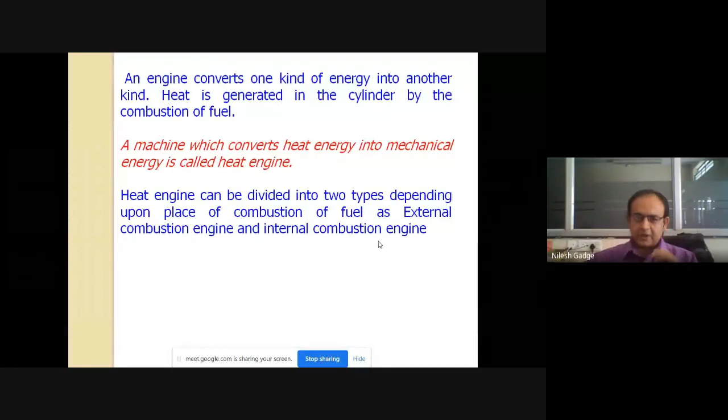In this type of engine, the combustion of the fuel takes place outside the cylinder. Such type of engine is called an external combustion engine. Steam engine is an example of external combustion engine. In a steam engine, coal is used as the fuel, and the burning of that coal takes place outside the cylinder. That's why it is called an external combustion engine.

Coal is burned in the furnace to boil the water in the boiler, which generates the steam, and then the steam thus generated is used to run the engine.

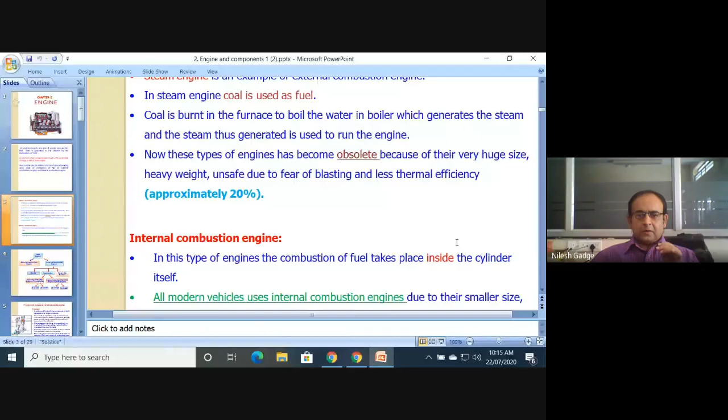Its thermal efficiency is just 20%, so it is not used nowadays.

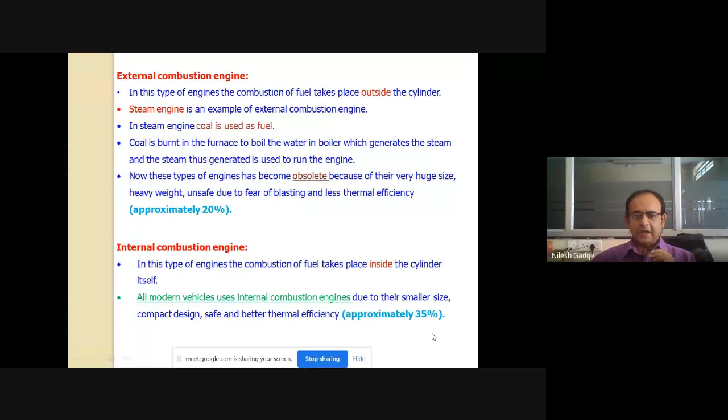Internal combustion engine, in short, is called an IC engine. In this type of engine, the combustion of fuel takes place inside the cylinder itself. All modern vehicles use internal combustion engines due to smaller size, compact design, safety, and better thermal efficiency. Approximately, thermal efficiency is 35%. That's why IC engines are used.

There is a classification of the heat engine: external combustion engine and internal combustion engine. Internal combustion engine is again classified as Wankel, reciprocating type, rotary, and gas turbine. We are going to study only the reciprocating engine. Don't get confused; the Wankel type, rotary, or gas turbine are not necessary. Just concentrate on the reciprocating type internal combustion engine.

It is again classified as spark ignition engine, and the second type is the compression ignition engine. Spark ignition engine is a petrol engine; in short, it is called an SI engine. Compression ignition engine, in short, is called a CI engine, and it is a diesel engine. The spark ignition or petrol engine is of two types: two-stroke engine and four-stroke engine, and the compression ignition engine is also of two types: two-stroke engine and four-stroke engine.

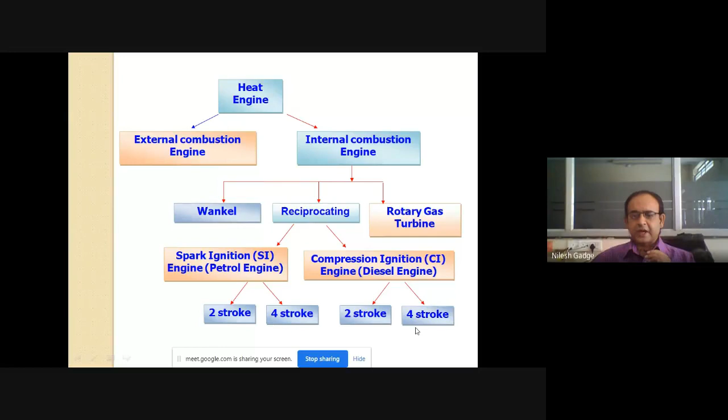So how does this engine work? It may be a four-stroke engine or two-stroke engine. It may be a petrol engine or diesel engine. Principle and working of internal combustion engine or IC engine. Principle: a mixture of fuel with the correct amount of air is exploded in an engine cylinder.

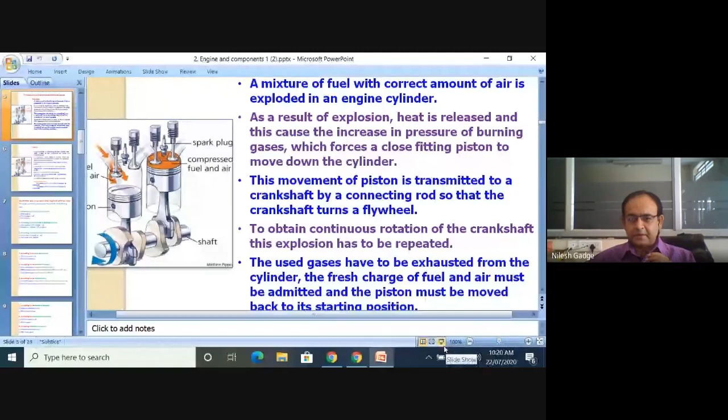So as a result of the explosion, when air and fuel mixture gets exploded inside the cylinder, we can see that power is generated. The power is generated inside the cylinder. Just now see the principle of working, or general principle of working, of IC engine.

As a result of explosion or combustion of air and fuel mixture inside the cylinder, heat is released and this causes the increase in the pressure of burning gases. So, when the combustion of air and fuel mixture takes place inside the cylinder, a large amount of heat is produced inside the cylinder, and it causes a high pressure of burning gases, which forces the closely fitting piston to move downward.

The piston has gone upward. It will come downward because of the pressure developed by burning gases. This movement of piston is transmitted to crankshaft by connecting rod so that the crankshaft turns a flywheel. Actually flywheel is the component; it is not shown here. The movement of piston is transmitted to the crankshaft. See, this shaft is the crankshaft.

When the piston moves upward and downward inside the cylinder, it gives the motion to the flywheel, and it starts rotating. To obtain continuous rotation of the crankshaft, this explosion has to be repeated. Means combustion of the fuel should be repeated inside the cylinder so that this crankshaft will be rotated continuously, and this flywheel also will rotate continuously.

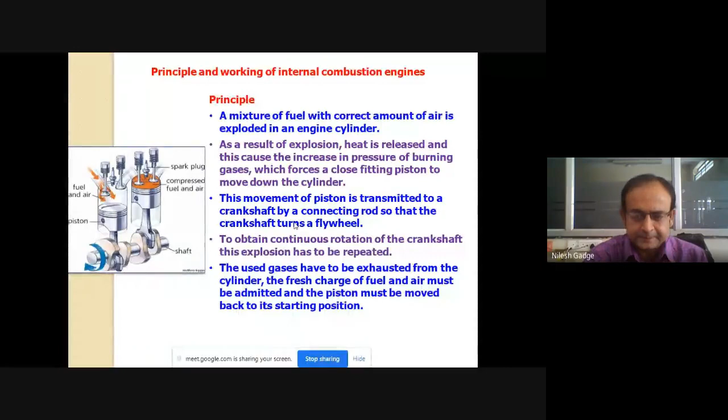Okay, so this is in general the working of heat engine or internal combustion engine. When we see the working of four-stroke engine and two-stroke engine, I will again explain this principle of working. Okay, so engine converts reciprocating motion of the piston into rotary motion of the crankshaft by means of connecting rod.

If you see the figure, the piston moves upward and downward. The movement of the piston is upward and downward. Hello.

So the piston moves upward and downward. When the piston moves upward and downward, this motion is called reciprocating motion. This reciprocating motion of the piston gets converted into the rotary motion of the crankshaft. That motion, with the help of this connecting rod, gets converted into the rotary motion.

This crankshaft is rotating. The engine converts a reciprocating motion of the piston into rotary motion of the crankshaft by means of the connecting rod. Piston is closely fitted in cylinder. Rings are inserted in the circumferential grooves of the piston to prevent leakage of the gases.

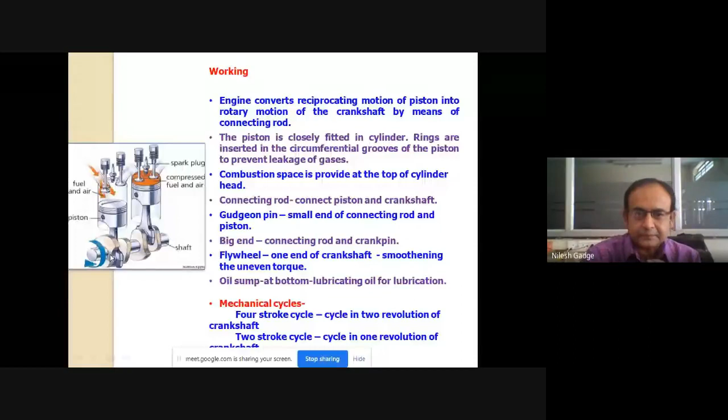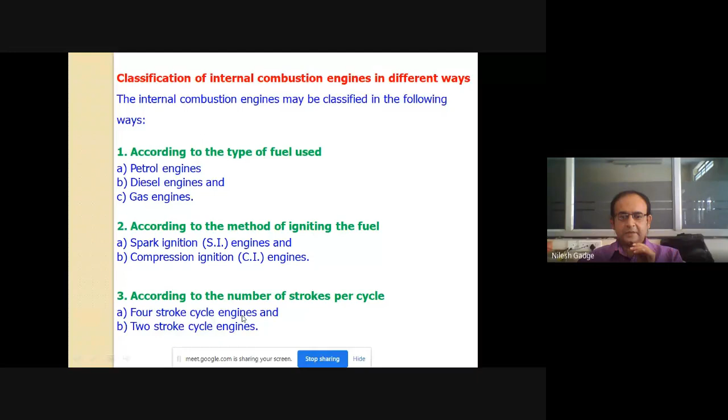Classification of IC engine in different ways: according to the type of fuel used, it is petrol engine, diesel engine, gas engine. According to method of igniting the fuel, it is spark ignition engine, in short SI engine, and compression ignition engine, in short CI engine. According to the number of strokes per cycle, the engine is classified as four-stroke cycle engine and two-stroke cycle engine. According to the cycle of engine, which we will see in detail later, Otto cycle engine

and diesel cycle engines. According to the speed of the engine, slow speed engine speed is below 350 rpm. Medium speed engine, its speed is 350 rpm to 1000 rpm. High speed engine speed is over 1000 rpm. According to the cooling system, there are air cooled engines and water cooled engines. Air cooled engines are used on motorcycles, scooters, small cars. Water cooled engines are used on trucks, tractors, and heavy vehicles.

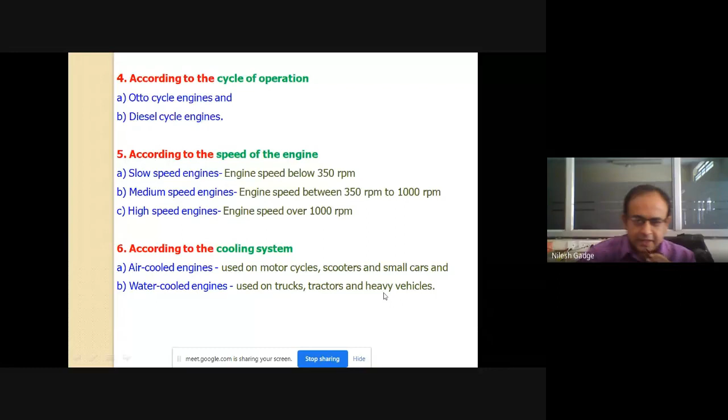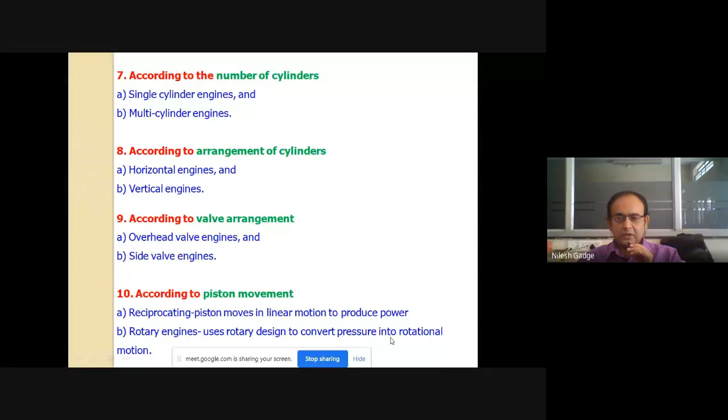According to the number of cylinders, single cylinder engine, multi cylinder engine. According to the arrangement of cylinders, horizontal engine, vertical engines. According to valve arrangement, overhead valve engines, side valve engines. According to the piston movement, reciprocating piston moves in linear motion to produce the power, and rotary engines use rotary design to convert pressure into rotational motion. There are two main engines we will study in this course: four-stroke engine operation and two-stroke engine operation.

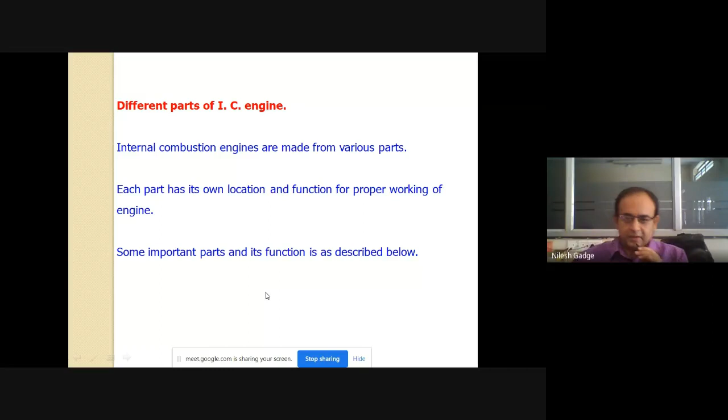Now we will see parts of IC engine, internal combustion engine, or components of internal combustion engine. Different components or parts of IC engine are described in the next slides. Cylinder block.

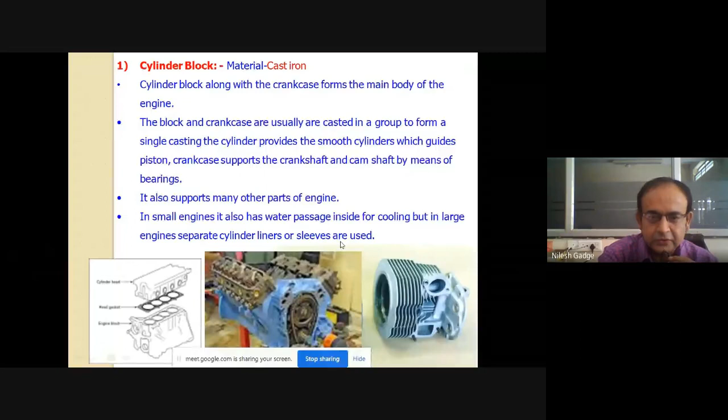So cylinder, one by one we will see this type of cylinder, some figures about the cylinder. Cylinder is the part which converts thermal energy into mechanical energy with the help of the piston, which is inside the cylinder. Its primary function is to contain the working fluid, and a secondary function is to guide the piston. There are some cylinder liners: wet liner and dry liner.

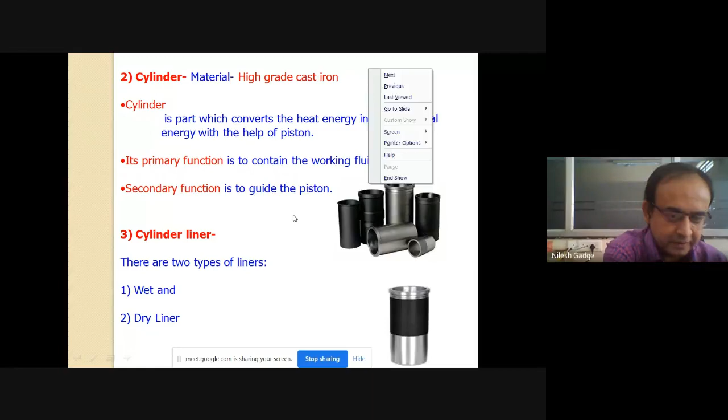Just wait, I will show you the figure of the engine.

Is it visible to you? Hello. Sir, hello, it was a bit far. Okay, is it visible now? Yes. Sir, a bit up. Okay, now. Yes, yes, okay.

So this is the cut section of a four-stroke engine. It is a petrol engine. This is the cut model actually. Am I audible? Is my voice audible or not? Yes sir, hello, okay. So this is the cut section.

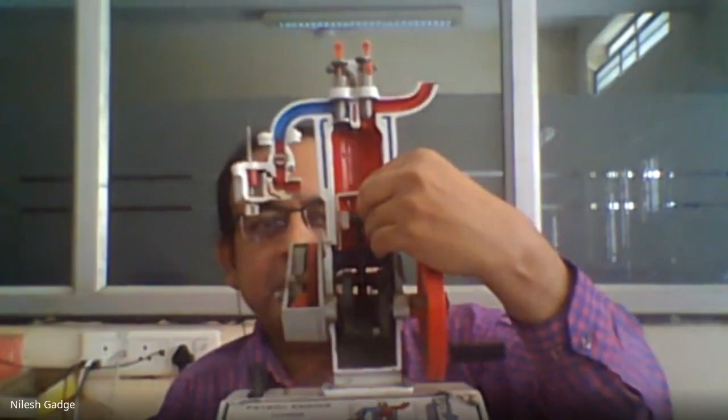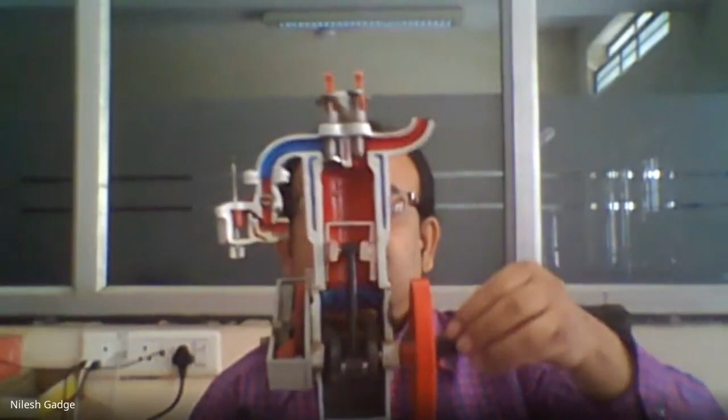This part is actually your cylinder, this is the cut model. So whatever this component is, this is your piston, which moves up and down. The piston moves up and down. This part is the piston actually, which is moving inside the cylinder.

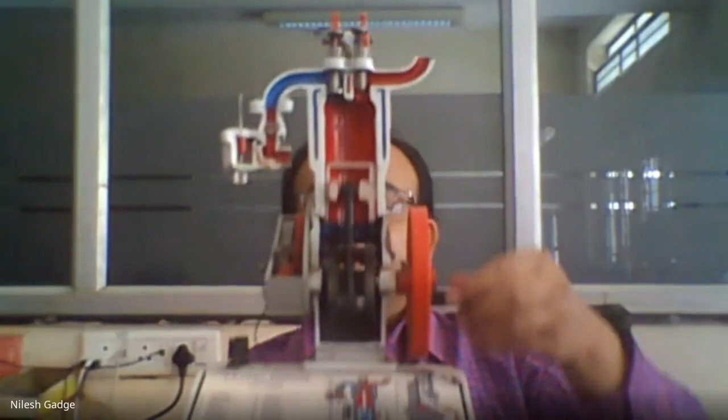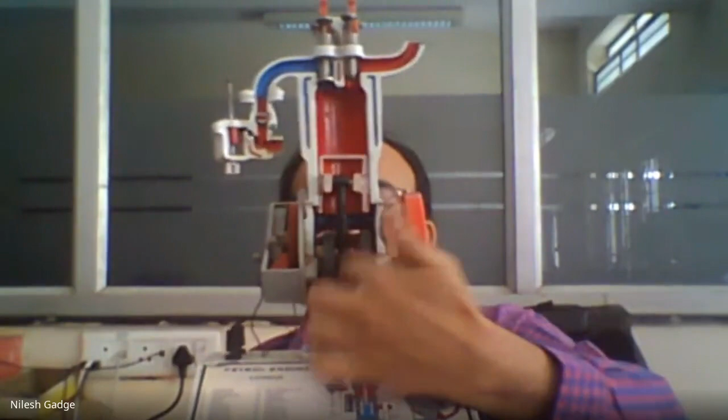Again you see this component, this component is a connecting rod. And say this component is a flywheel, just assume this component is a flywheel. This component is a timing gear.

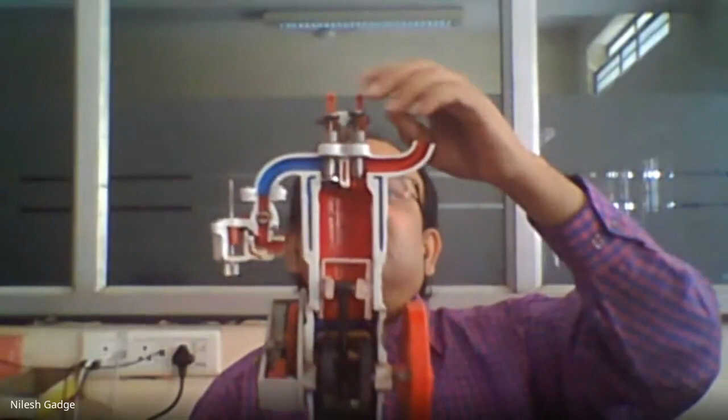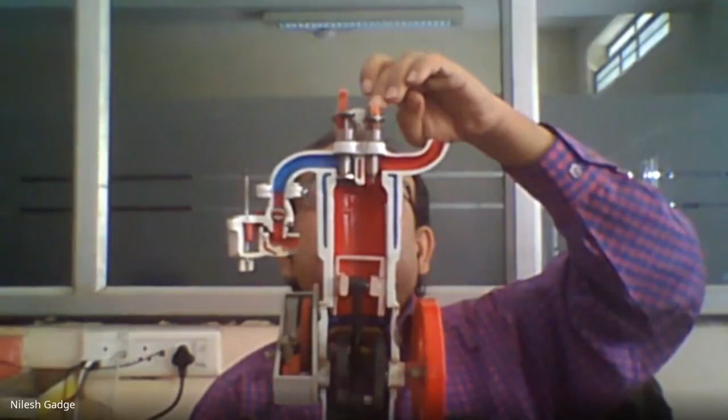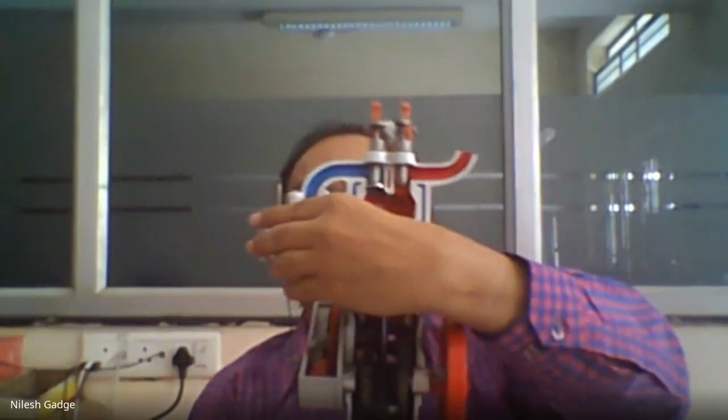There are two valves. See, there are two valves: one valve is the inlet valve, and the second valve is the exhaust valve. And one passage, this part is maybe a carburetor, where the air and fuel mixture is mixed. The mixture means petrol and air is mixed inside the carburetor, and then it is supplied to the engine, meaning the cylinder.

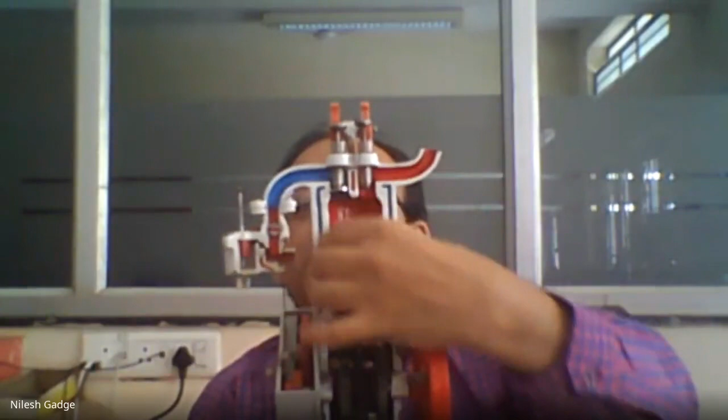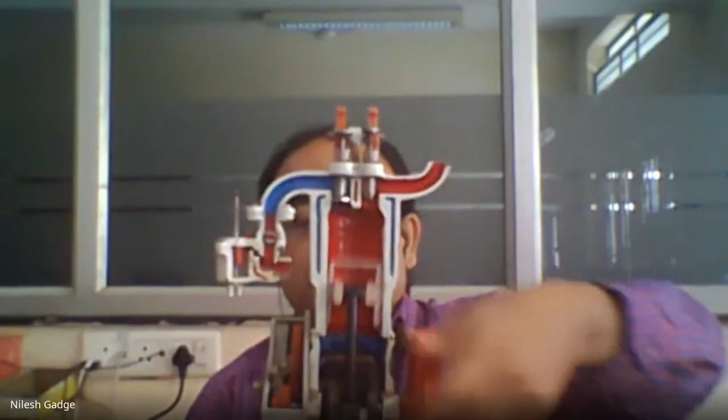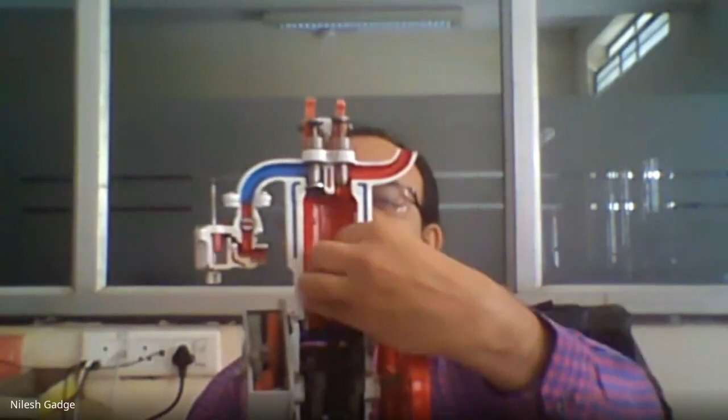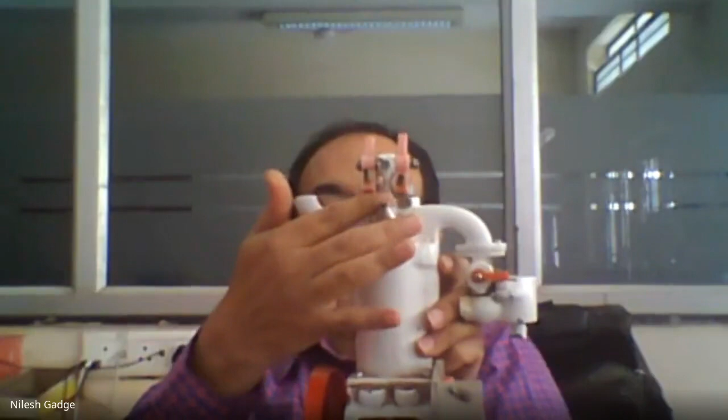In that we will see just the components. This is your crankshaft, say this is your crankshaft, this is the crankshaft. This is the connecting rod, this is the flywheel. This is the inlet valve, this is the exhaust valve. This whole assembly is called the cylinder. This, which is going upward and downward, is the piston. This is the connecting rod, this is the flywheel, this is the timing gear. And one component is also there: this is a spark plug, called the spark plug. Spark plug is provided in the petrol engine.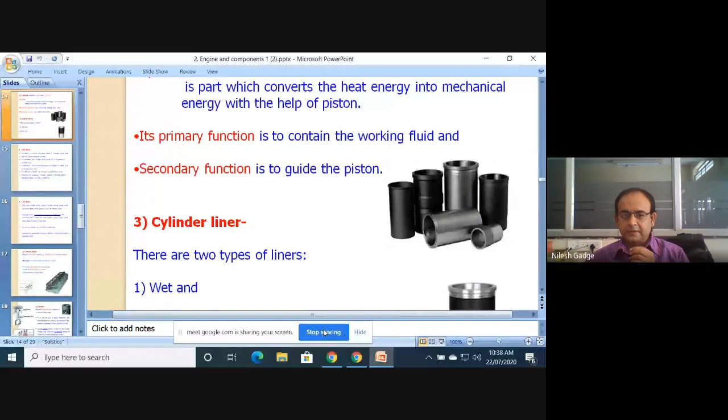Now again I will present you the screen so that you can understand the components. Just wait, I will present the screen again. Just wait, we will start the sharing again. Okay, so you can see the screen now.

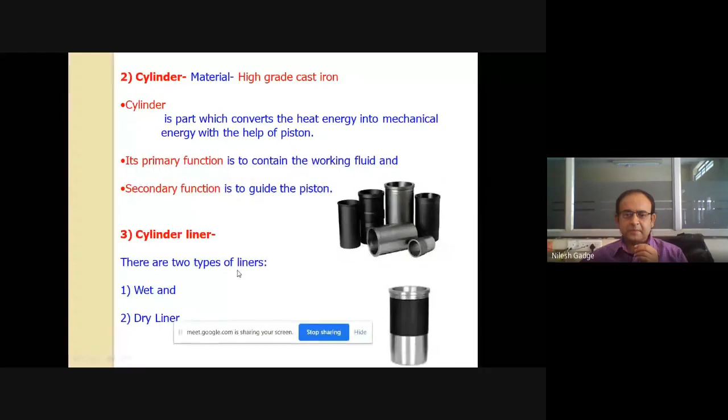There is a cylinder liner. There are two types of liners, the wet liner and the dry liner. So what is the function of a wet liner? Why is a wet liner provided? It is directly in contact with the water, hence it is named a wet liner. A wet liner forms a complete cylinder. It is provided with a flange at the top to fit in the groove of the cylinder block. At the bottom of the liner, a groove is provided for a rubber ring for sealing the water leak.

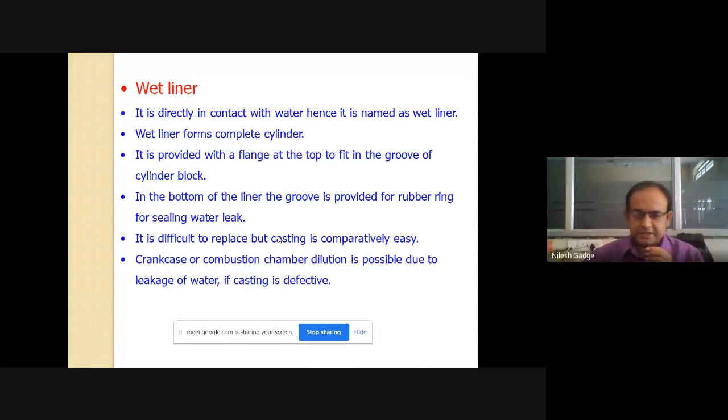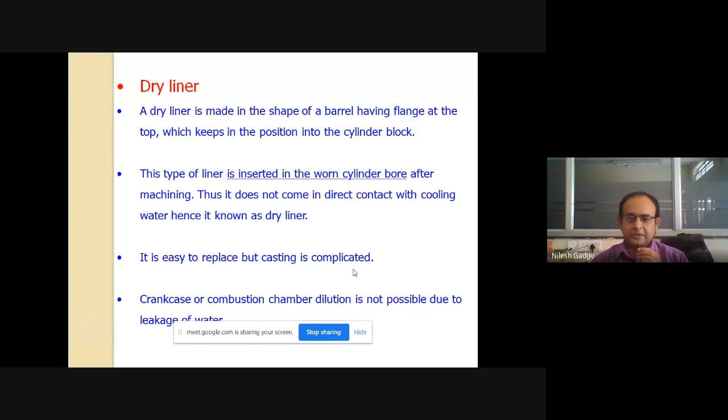I will provide its video so that you can understand where these parts are located. It is difficult to replace, but casting is comparatively easy. Crankcase or combustion chamber dilution is possible due to leakage of water if the casting is defective. The liner is made in the shape of a barrel having a flange at the top which keeps it in position into the cylinder block. It is not necessary to remember what is wet liner and dry liner, because they are very minor components. This type of liner is inserted in the cylinder bore after machining. It does not come in contact with the cooling water, hence it is known as a dry liner. It is easy to replace, but casting is complicated. Crankcase or combustion chamber dilution is not possible due to leakage of water.

These are the inlet valves and the exhaust valves. This is the cylinder head, which is made from cast iron or aluminum alloy in some cases. The function of the cylinder head is that it carries the inlet and exhaust valves. In a petrol engine, a spark plug is provided, and in a diesel engine, a fuel injector is provided instead. Spark plug is not present in a diesel engine. So this is the figure of the cylinder head.

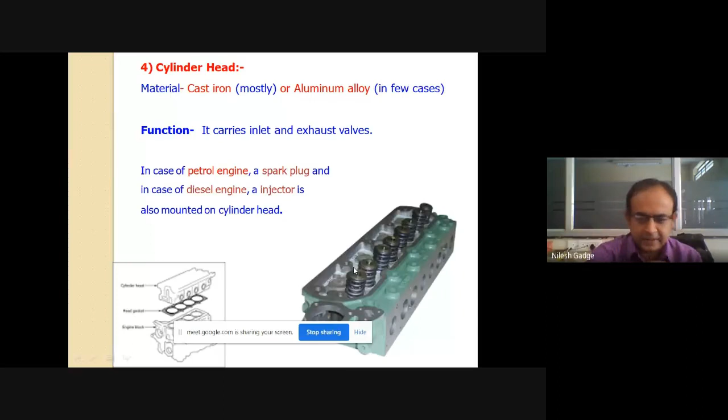So the piston moves upward and downward inside the cylinder. During the suction stroke, also called the intake stroke, it sucks fresh charge, which may be air, or fuel, or an air-fuel mixture. This mixture is taken inside the cylinder through the inlet valve and compressed during the compression stroke inside the cylinder.

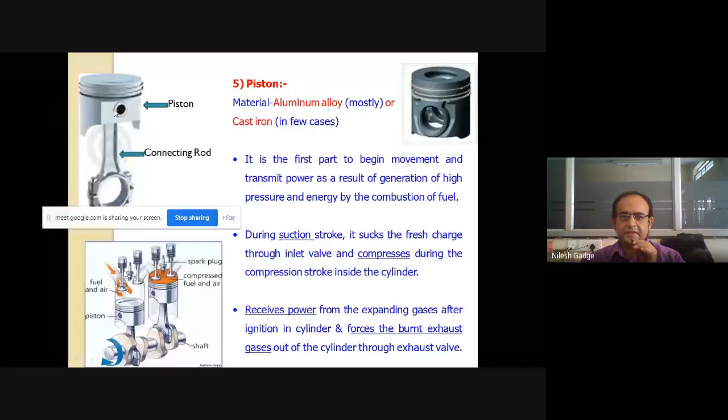It receives power from the expanding gases after ignition in the cylinder and forces the burnt exhaust gases out of the cylinder. When we study the two-stroke and four-stroke engines, I will explain all these things again. For now, you should understand that this component is the piston, which makes an upward and downward movement, also known as a reciprocating movement, inside the cylinder.

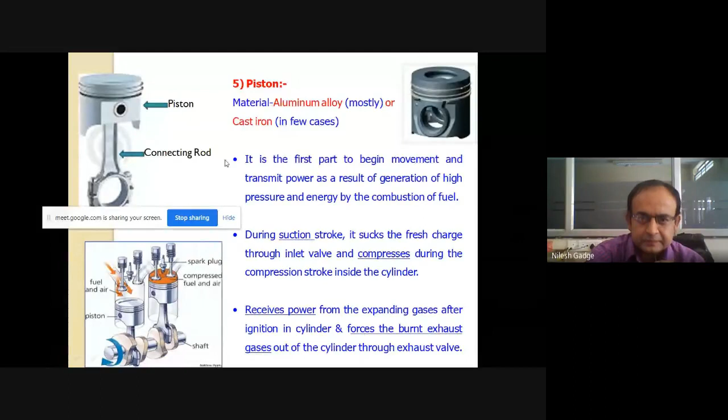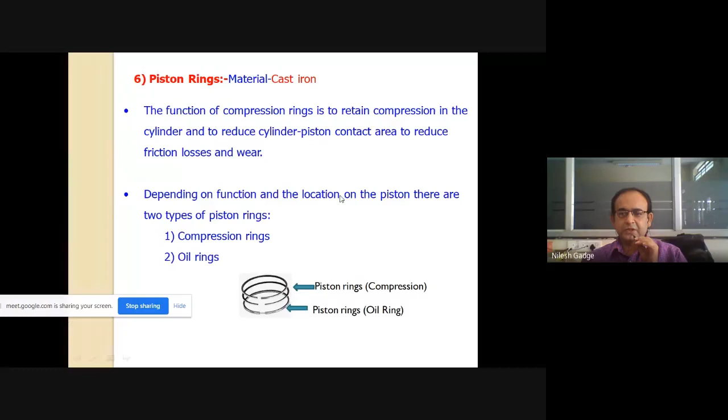Piston ring is made from cast iron. The function of the compression rings is to retain compression in the cylinder and to reduce the piston-cylinder contact area, to reduce friction loss. This is the main function, to reduce the friction between the piston and the cylinder. These piston rings reduce the friction between the cylinder wall and the piston. Depending on function and location on the piston, there are two types of piston rings: compression rings and oil rings. The function of the piston ring is to reduce the contact area, so that it reduces friction between the piston and the cylinder, and reduces wear and tear.

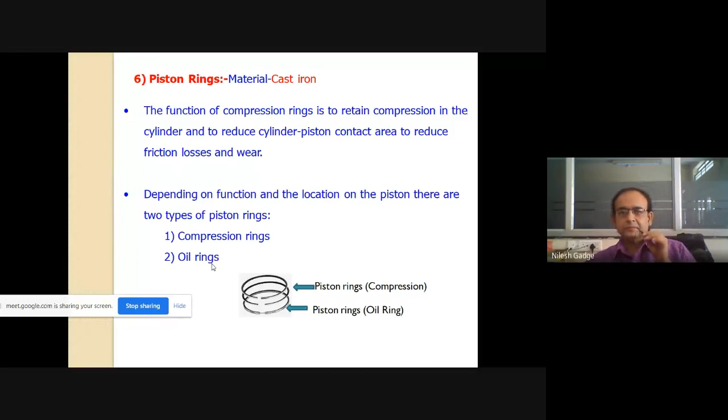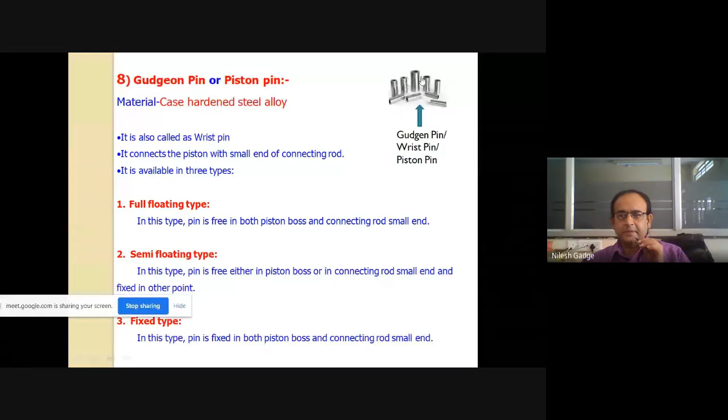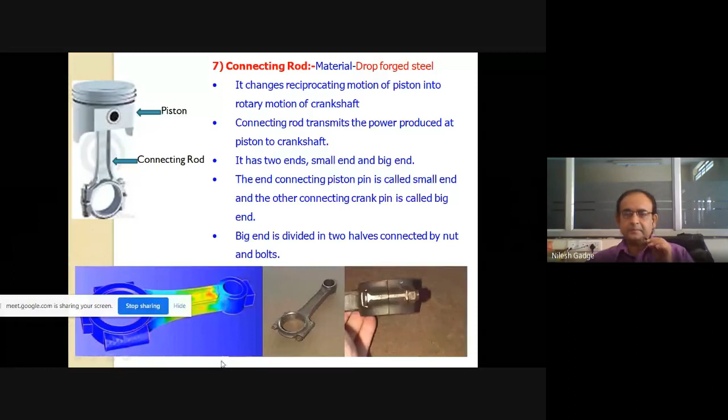Gudgeon pin, or the piston pin. Such pins are called gudgeon pin, wrist pin, or piston pin. What is the function of that? I will show you again. This part is called the gudgeon pin or piston pin. The piston and the connecting rod get connected with the help of the gudgeon pin. This connecting rod and this piston get connected because of the gudgeon pin, or wrist pin. It is also called the wrist pin. It connects the piston with the small end of the connecting rod.

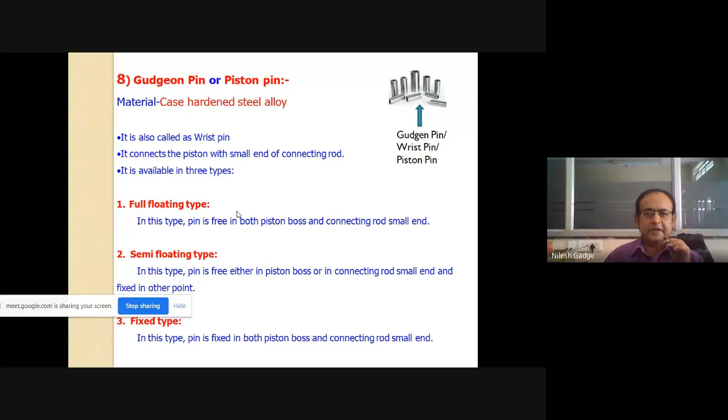It is available in three types: full floating type, semi floating type, and fixed type. These details are not that necessary. You should just know the function of the gudgeon pin and where it is located, which is also known as the piston pin.

Again, connecting rod, piston, and the pin. See this assembly - this is the piston, this is the piston pin or gudgeon pin or wrist pin, this is the connecting rod. This is the bearing insert, and this is the connecting rod cap.

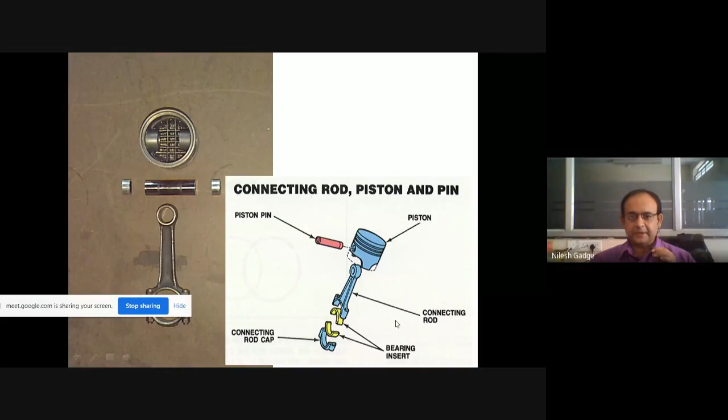By this assembly, using this connecting rod, it gets connected to the crankshaft. The crank pin is there - it hands over the power and motion to the crankshaft, which comes from piston through the connecting rod. This is your crankshaft. Such type of arrangement is a crankshaft.

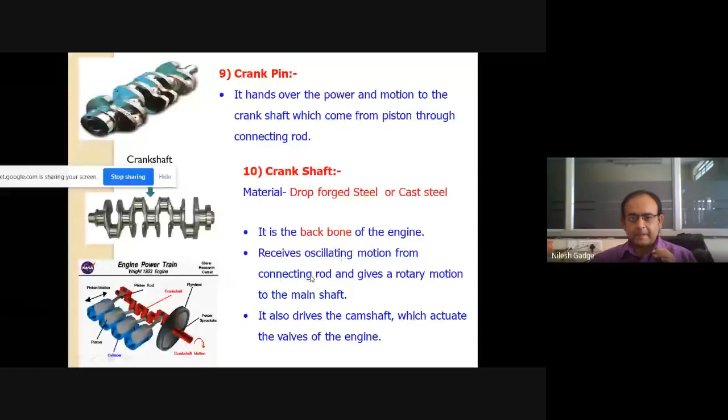It is the backbone of the engine. It receives oscillating motion from connecting rod, also known as reciprocating motion. It receives oscillating motion from the connecting rod and gives rotary motion to the main shaft - main shaft means the crankshaft. It drives the camshaft. Okay, if you see the figure, just see the figure.

There are four cylinders and four pistons. The movement of the piston will be upward and downward, upward and downward. This shaft is called the crankshaft.

This is your flywheel, and after flywheel, there is a crankshaft. There are two shafts - see, this is a crankshaft, and this is a camshaft.

What happens because of the upward and downward movement or oscillating motion of this piston? This oscillating motion or reciprocating motion gets converted into the rotary motion of the crankshaft because of the connecting rod. This motion is received by the flywheel, and the flywheel stores that energy, and then it is given to the crankshaft.

It also drives the camshaft, which actuates the valves of the engine. Actuate means closing and opening of the inlet and exhaust valve, which takes place with the help of camshaft motion.

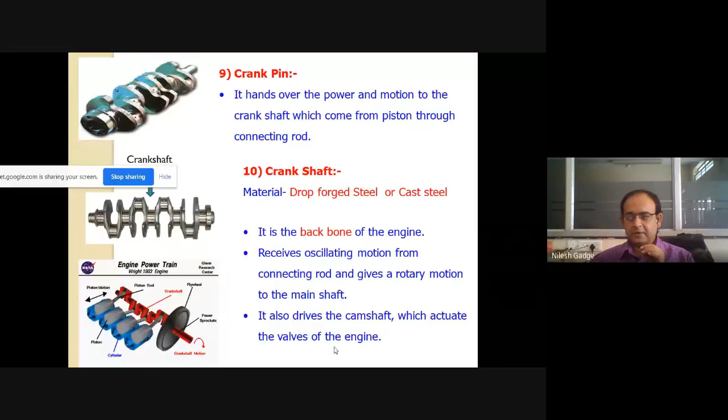I will send you the video. From that, you can understand how the closing and opening of the inlet and exhaust valve takes place.

So the flywheel we have seen in the previous slide. The flywheel is bolted to the rear end of the crankshaft to store energy. What is the function of flywheel? It stores the energy received in the power stroke and keeps the crankshaft rotating in the idle strokes.

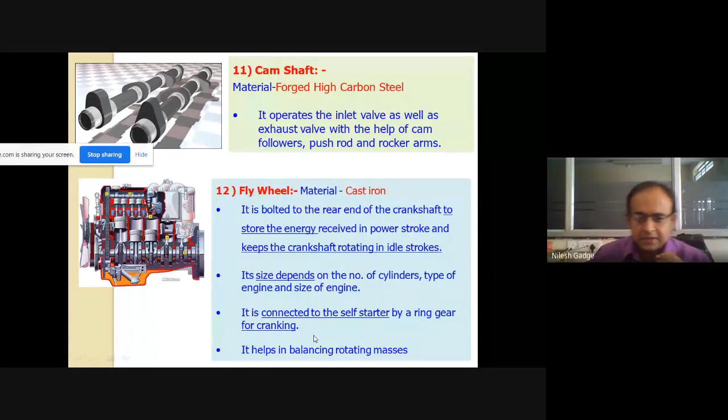Its size depends on the number of cylinders. If there are 4 cylinders, 6 cylinders, then the size of the flywheel will increase, depending on type of engine and size of engine. It is connected to the self starter by a ring gear for cranking. It helps in balancing rotating masses.

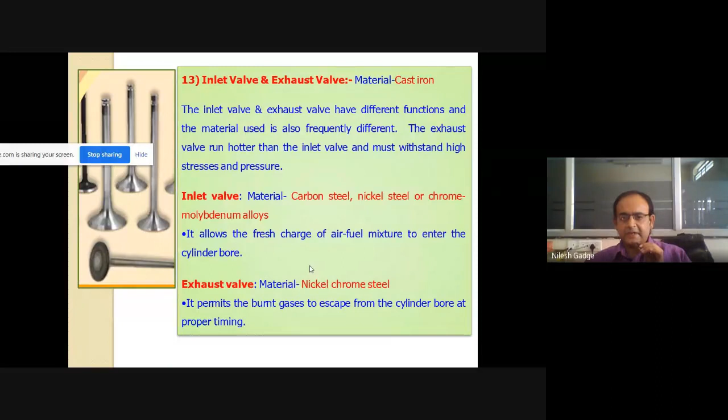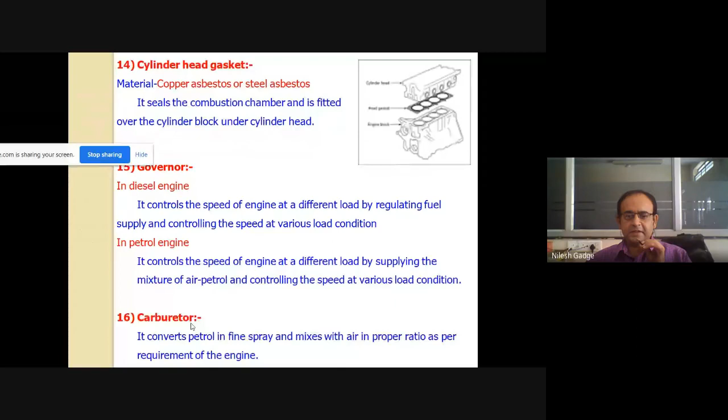In the carburetor there is a mixture of petrol and air. The mixture of petrol and air takes place inside the carburetor. This process is also called carburation. So what is the function of the carburetor? The mixture of petrol and air, or the mixture of fuel and air, takes place inside the carburetor in the right proportion, and that process is called carburation.

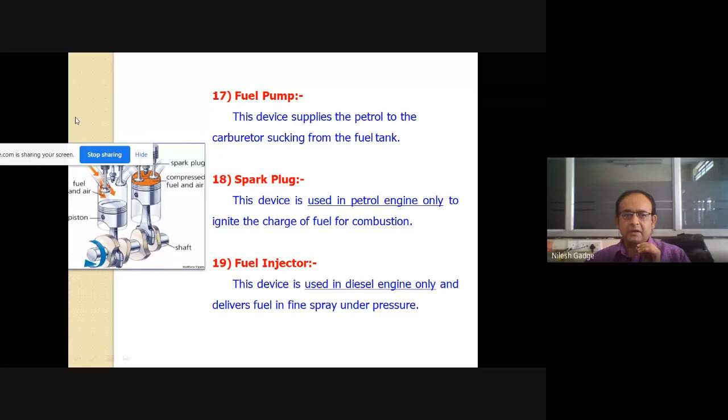There is also a fuel pump, which supplies fuel to the carburetor by sucking it from the fuel tank. A spark plug is provided only in the petrol engine to ignite the charge of fuel for combustion. A fuel injector is provided in the diesel engine only and delivers fuel in a fine spray under pressure. We'll see all these components later on while studying the four-stroke engine and the two-stroke engine.